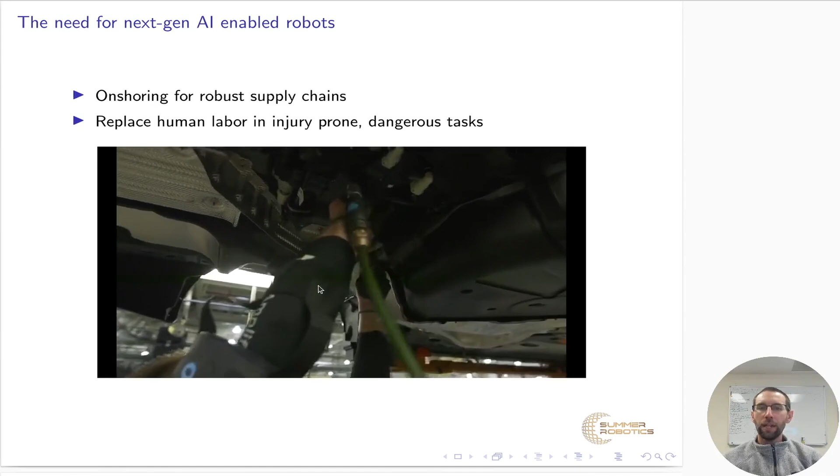To motivate what I'll be presenting, let's consider what might be needed for robotic automation solutions to break into new use cases. There's always a push for more automation to reduce labor costs, but recently there is an increased demand for onshoring manufacturing for more robust supply chains. Furthermore, many tasks that are repetitive and physically demanding can be dangerous and injury-prone, so automation can reduce workplace injuries.

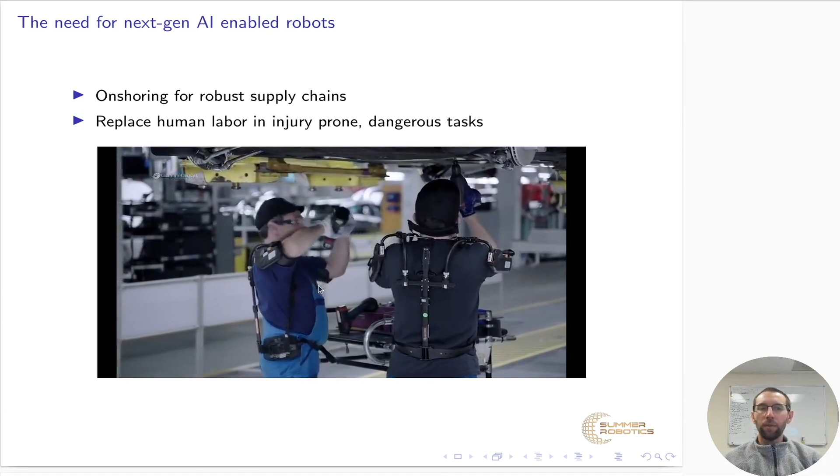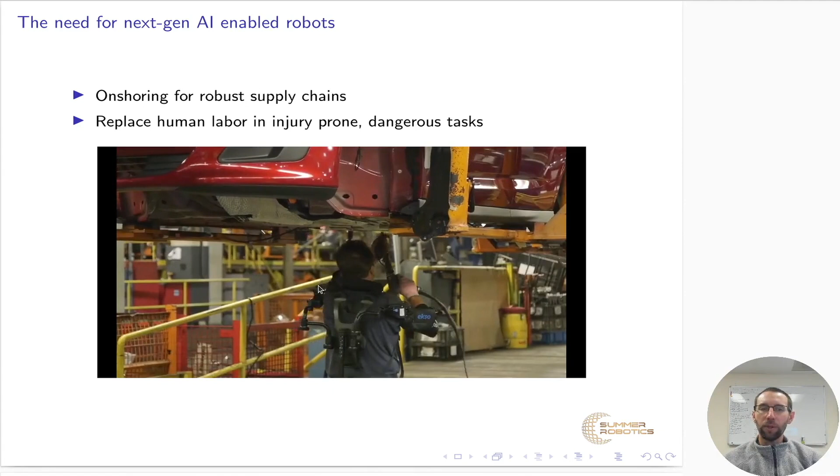In this video, we can see some automotive manufacturing tasks that have not yet been automated. The reason is that the hand-eye coordination and proprioception of a person is still unparalleled by robot technologies.

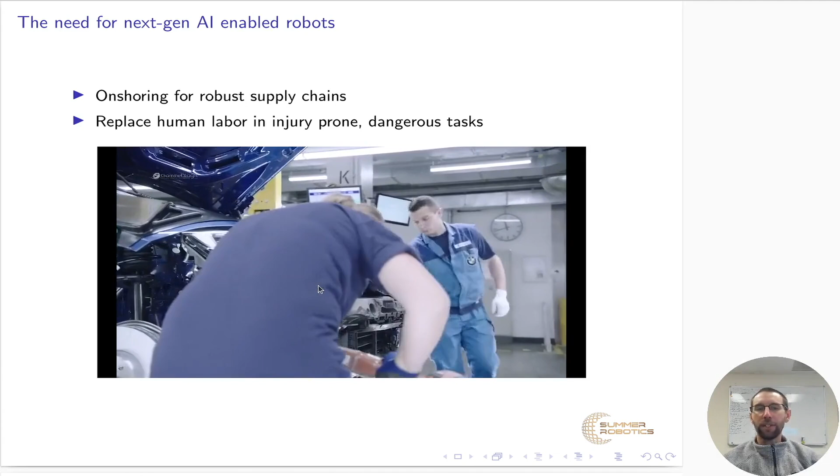The principal challenges in these use cases are the requirement that parts and fasteners be installed on a moving assembly line whose linear speed is varying and uncertain. Further, the task of installing a fastener on a moving assembly requires recognizing and tracking features on the assembly with sufficient speed and accuracy to offset a tool path to the dynamically changing position of the assembly.

Before we consider solutions to these challenges, let's look at some examples of the success that automation has had in manufacturing.

In this first video, we see an impressive team of ABB robots doing welding manipulation tasks. These robots are highly productive at this task and take humans out of this dangerous work environment. The reason this use case can be automated is that the assemblies come to a stop in fixtures that precisely locate the assembly relative to the robot's base frame, so that the tool path can be executed open loop.

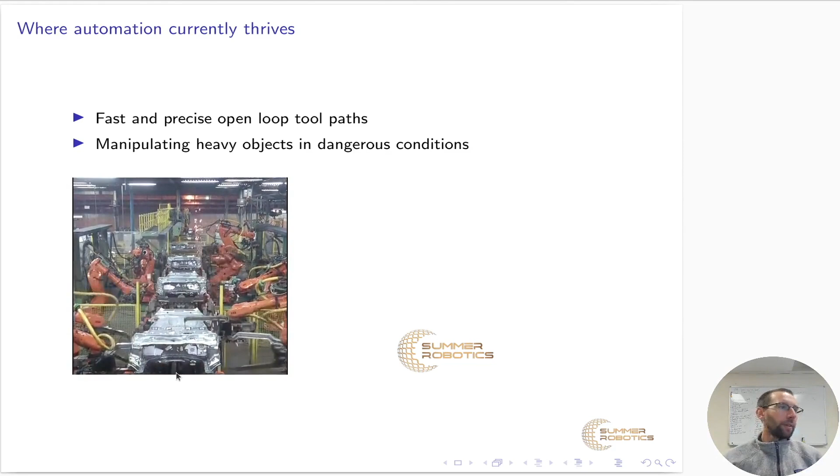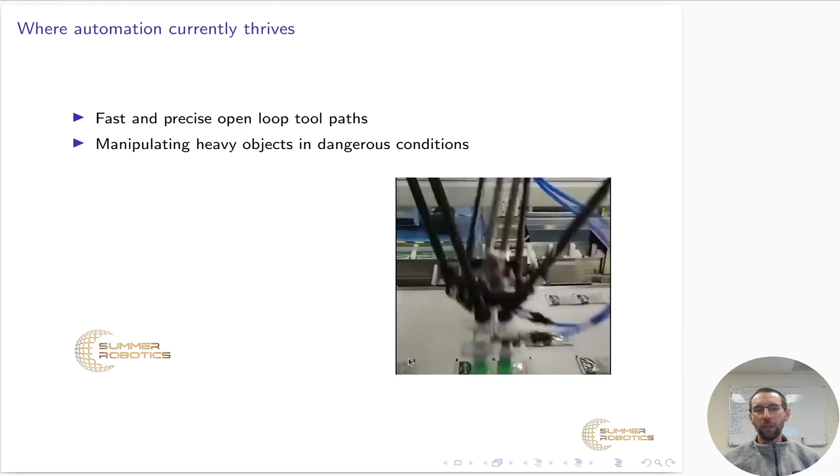In the second video, we see a slightly more sophisticated example of a Delta robot doing a structured pick-and-place task. A highly customized vision system and motion planning solution is tailored to the use case, and the vision system most likely images the target one time and does not need to dynamically update the motion plan after initially recognizing the target.

Recent advancements in AI with GPTs give robots a remarkable capacity to process data and make decisions. I, along with probably many of you, believe that GPT-powered robots will eliminate the elbow grease and software engineering needed to design and deploy customized robot work cells, in favor of generalizable robots that can get to work after digesting a worker training manual.

However, if we look at one example of a product that has been under development for over 3 years with a virtually unlimited budget, we see that there may be some wrinkles that need to be ironed out. We see a robot executing a pick-and-place task with battery cells. The use case is highly structured, and we can see what looks like a large-scale dataset generation operation specific to this use case. Yet the robot is executing the task slowly and with errors.

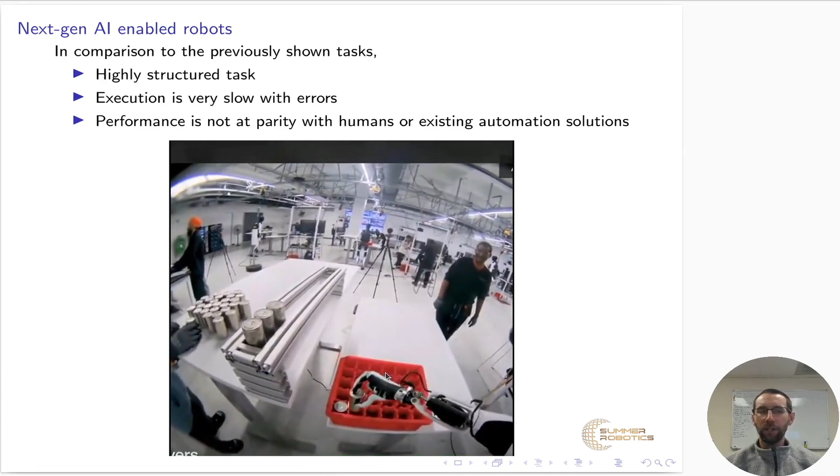So what's the limitation here? Why isn't this robot as impressive as the GPT chatbots? Remember that in order to exceed the capabilities of current solutions, we need to see the robot do this task with pretty much just a prompt, and not having an army of technicians generating supervised training data.

Our thesis is that high-functioning robots are throttled by data that is too high in latency and low in information density to be capable of solving the unmet automation use cases in manufacturing. In particular, conventional camera-based 3D pipelines are a significant bottleneck.

Then dense stereo correspondence will take 20 milliseconds to 1 second, depending on compute capabilities. Stereo correspondence also has a significant hardware and electrical cost if using dedicated FPGAs or GPUs.

Finally, the 3D depth computation from correspondences can take an additional 2 to 10 milliseconds. In the end, you can expect a conventional pipeline to have a photon to 3D point latency of 25 milliseconds to over a second. You may see frame rates as high as 100 Hz, but this is accomplished through parallel pipelining of sequential readouts, and ultimately the reaction time of a robot will be limited by latency.

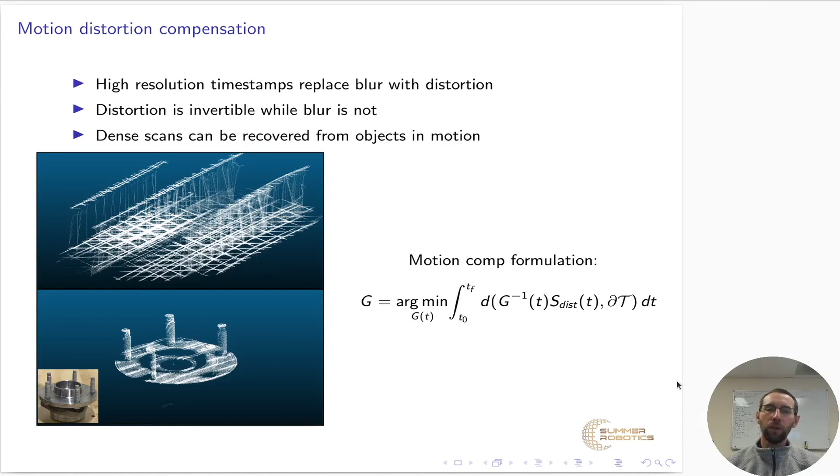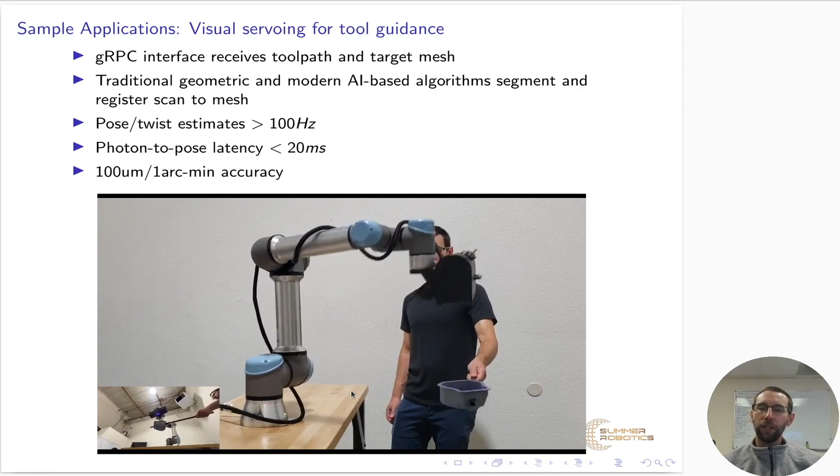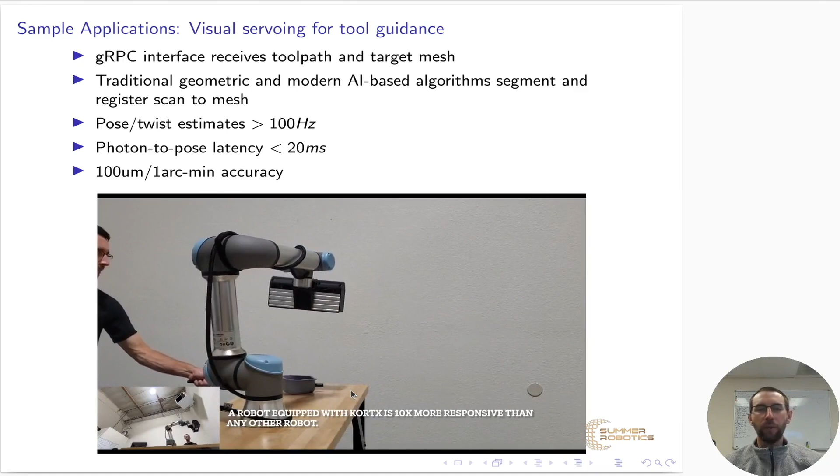The detection and localization of the target has a photon to pose estimation latency of less than 20 milliseconds, which enables highly dynamic applications. We've also validated the accuracy of the pose estimates to around 100 microns in translation and about 1 arc minute in rotation at a distance of 50 centimeters to 1 meter.

Another application we've been working on is inspection of parts and assemblies while in motion. Since we have the motion compensation feature, we can integrate a dense scan of an object in motion and recover the 3D reconstruction as if the part were stationary. This can be used, for example, to detect loose screws or assembly errors.

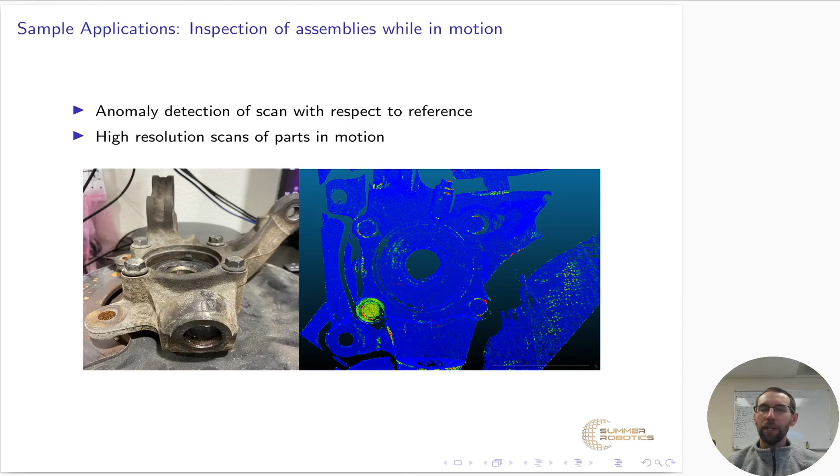To conclude, high latency and low information density data are major bottlenecks in enabling advanced robotic applications. Our technology, Kortx, is a paradigm shift. We focus on streaming atomic 3D data for low latency, high fidelity robot perception. We prioritize noise reduction over throughput for meaningful data.

Some key differentiators of our technology include photon to 3D data latency of less than 5 milliseconds, motion compensation capabilities that enable distortion-free reconstructions of dynamic targets, and accurate tool guidance for dynamic inspection capabilities. This enables robots to perform challenging tasks like dynamic tool guidance on moving assembly lines and precise inspection of fast-moving parts. Looking ahead, we believe this technology will be essential to enabling intelligent robots to interact with the world in real time.